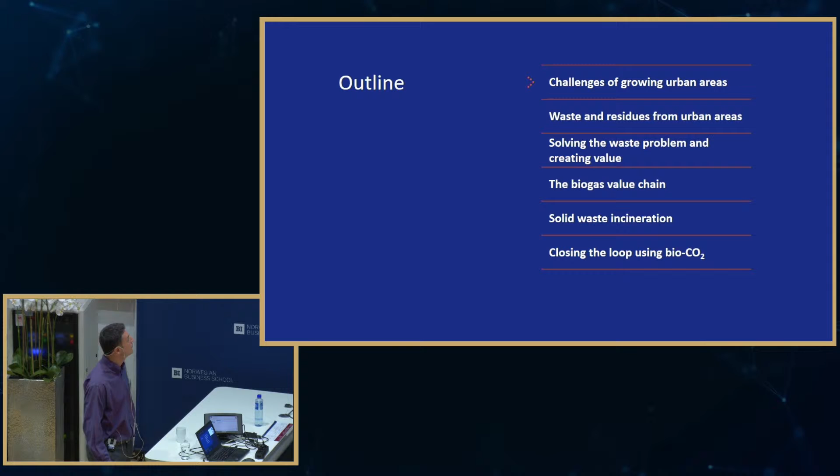So I will go briefly through the context and the challenges the cities are facing with waste. Defining waste and residues which are causing problems to these cities. How we can solve the problem and create value, and choose two examples, the biogas value chain and the solid waste incineration that was mentioned by Jannike. I will try to give you also an insight of how we can close the loop using CO2.

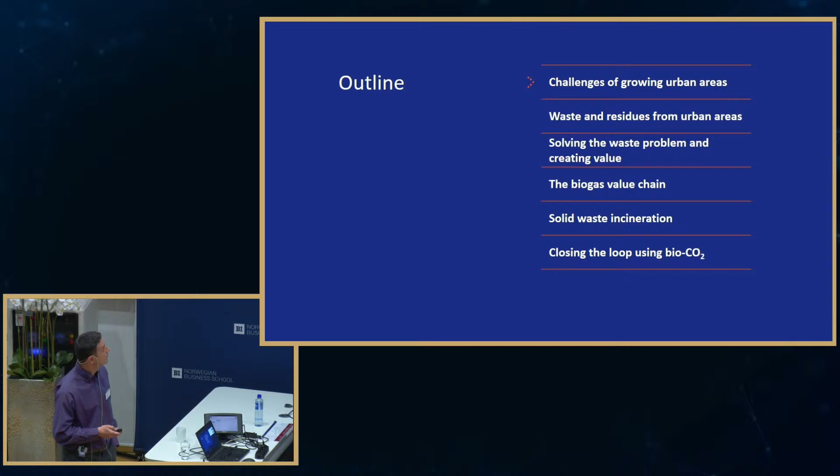Is it working? Yes, it's working. Just take it closer. Close enough. It's better now? Yeah. Okay.

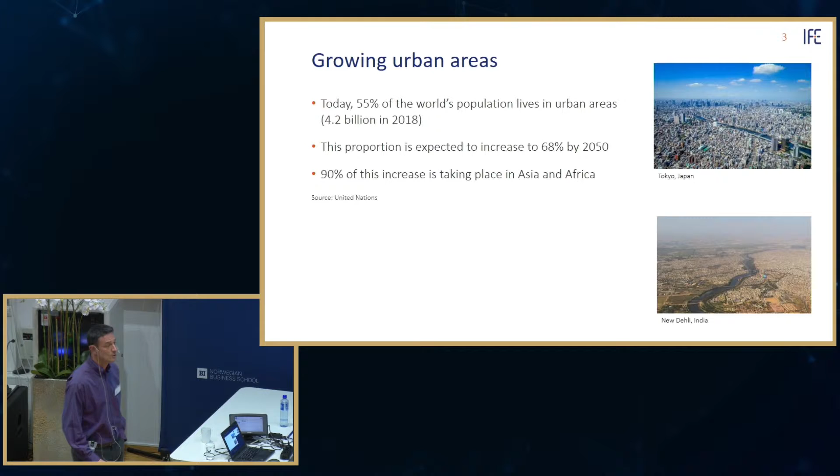So the context is that we have growing urban areas. This is for sure. And about 68% of the population will live in urban areas by 2050. And 90% of the increase is going to take place in Asia and Africa, so not in developed countries. So we all agree that sustainable urbanization is key to solve this issue.

And many countries are actually facing these problems in growing cities: housing, transportation, energy systems, and other infrastructures like waste handling, which I'm going to focus on. So the idea here is that waste handling in urban areas has to be part of the solution.

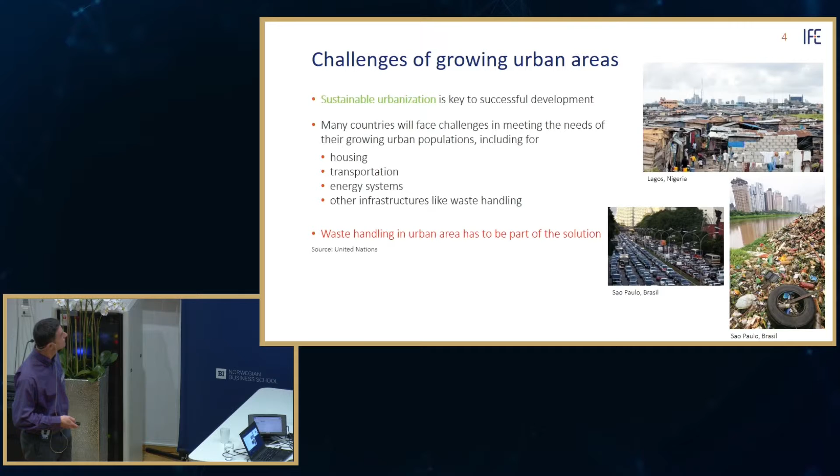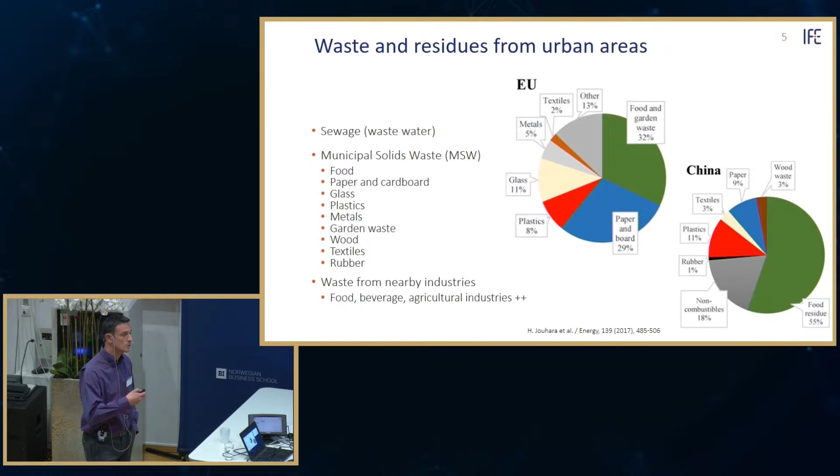So which waste are we talking about? In cities, basically, you have liquid waste, which are sewage, wastewaters, and solid waste that we define as MSW, municipal solid waste. Some of these wastes are sorted out, and we try to recycle, and the rest we have to get rid of in a smart way.

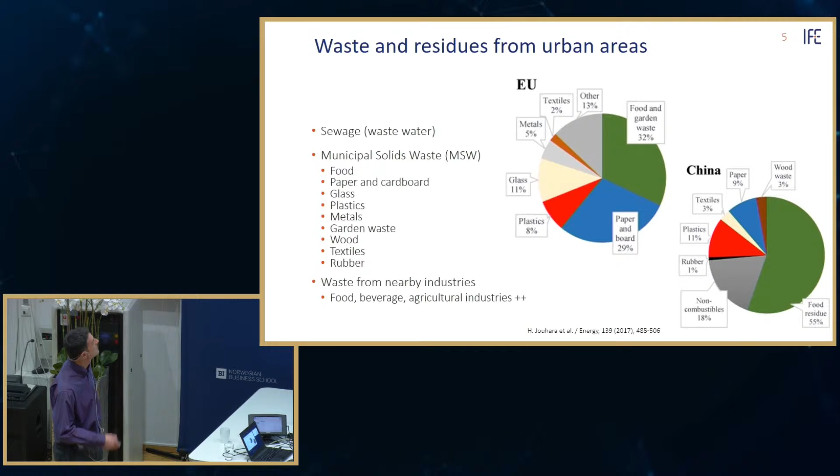There is a comparison between EU and China. You see that what is dominant is food waste, paper, plastics, glass, metals. You have also waste produced from nearby industries, close to cities. That's typically food, beverage, agricultural industries.

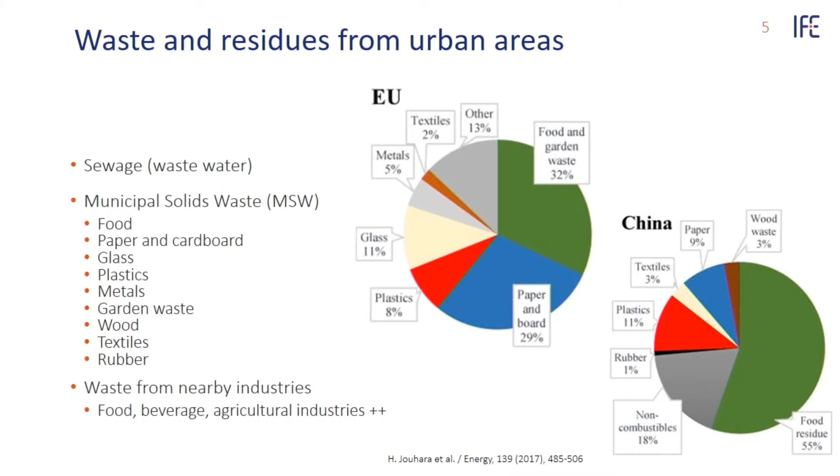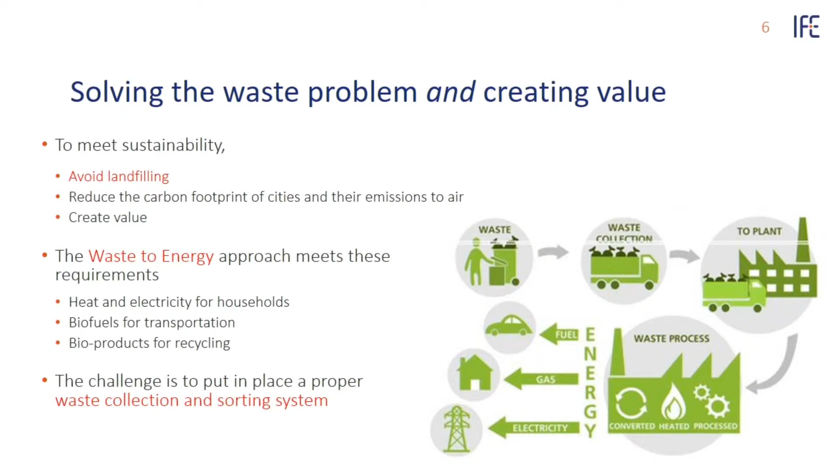So how to solve the problem and try to create value? Well, we agree that we have to meet sustainability, and we have to avoid landfilling. Landfilling can cause pollution to ground and water, and this we want to avoid. It's also important to reduce the carbon footprint. We've heard that today many times, and emissions to air, among others, NOx, and try to create value.

So there is one clear option which has been pointed out today several times. This is what is called the waste to energy approach, because it meets all these requirements. You can produce heat and electricity for households. You can produce biofuels for transportation or other clean fuels.

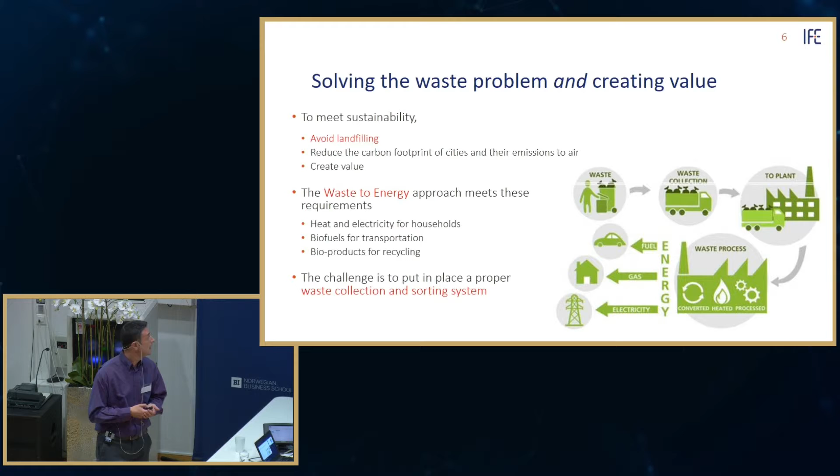Biogas is produced in a closed system in a so-called anaerobic digester, which is actually the biodegradation of organic matter in the absence of oxygen. That's the microorganisms eating the organic matter. Typical biogas composition is about 60% methane and 40% CO2. And this CO2 is mostly bio-CO2, if it's only organic matter, of course.

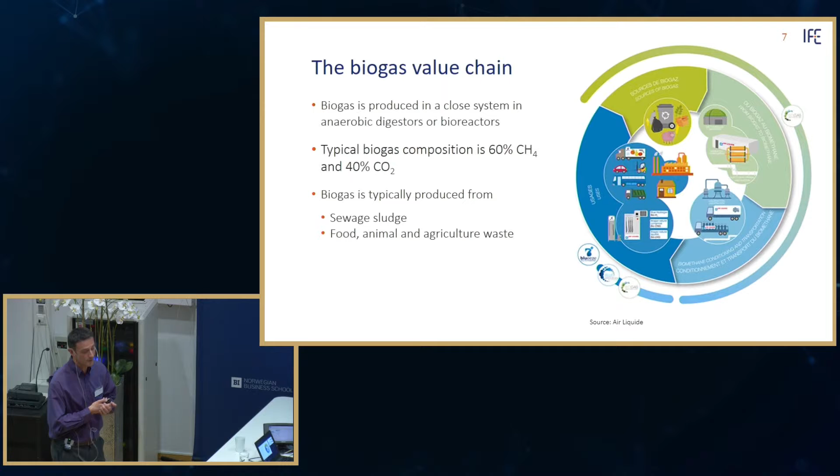Biogas is typically produced today from sewage sludge. So the sludge that is recovered after the treatment of wastewater. That's quite big quantities for big cities. And food, animal, and agricultural waste. So food waste residues, and what we throw away, manure from animals, or residues from industries where you produce food from animals, and crops, agricultural crops.

So we go into detail for this value chain. So you have the digester in the center, and you feed the different waste in the digester, and what you get from it is a raw biogas containing mostly methane and CO2, plus some impurities, and a solid residue that we call digestate.

This biogas, you can use it directly. You have to clean it a little bit and remove some water, and then you can burn it in a so-called combined heat and power installation, where you produce both heat, which is mainly hot water for district heating, and electricity.

The most common way is to use so-called gas engines. So it's a bit bigger engines than what you have in your car, but it's the same principle. Coupled to an alternator to produce electricity. And recently, fuel cells have been pointed out as a very good option because their efficiency is much higher, 50% compared to approximately 35-40% for gas engines.

Then this biogas, you can upgrade it and increase its value. If you increase its value, you have to remove what doesn't have too much value at first, at least. That's the CO2 and impurities. And then you're left with what we call biomethane, which is 97% methane.

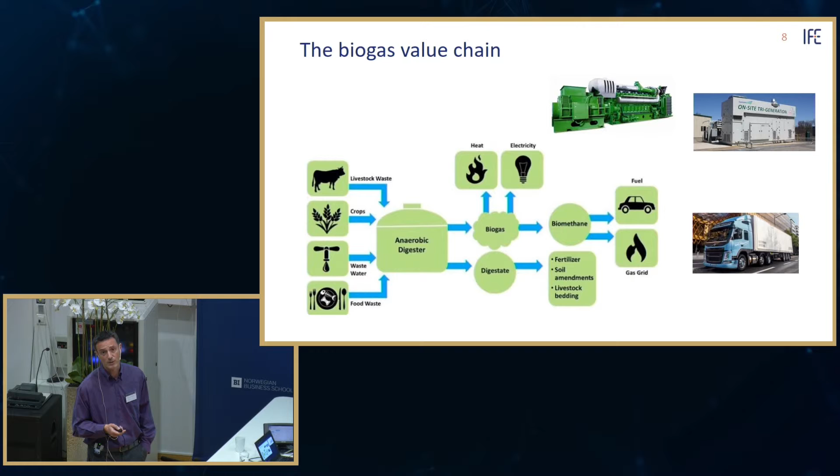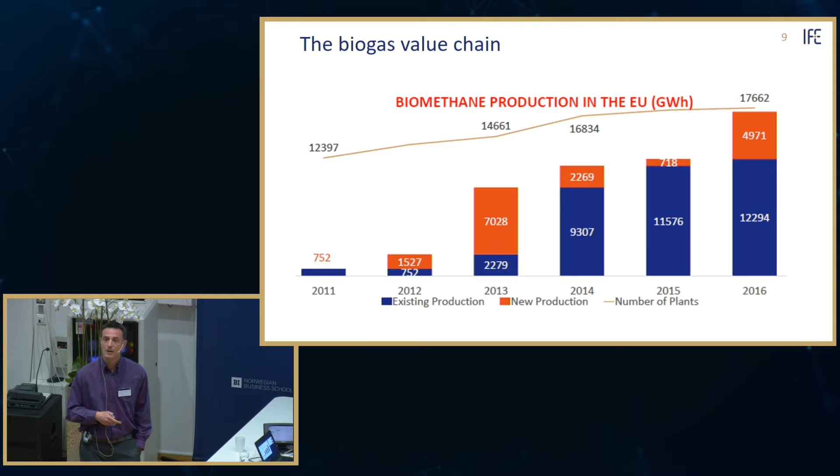Biomethane production is increasing dramatically, I would say, in the EU. You see here from 2011 to 2016. And we are exploiting just 10% of the possibilities we have. It's true that from cities it's a bit limited, but it can be expanded around cities also to other types of organic residues.

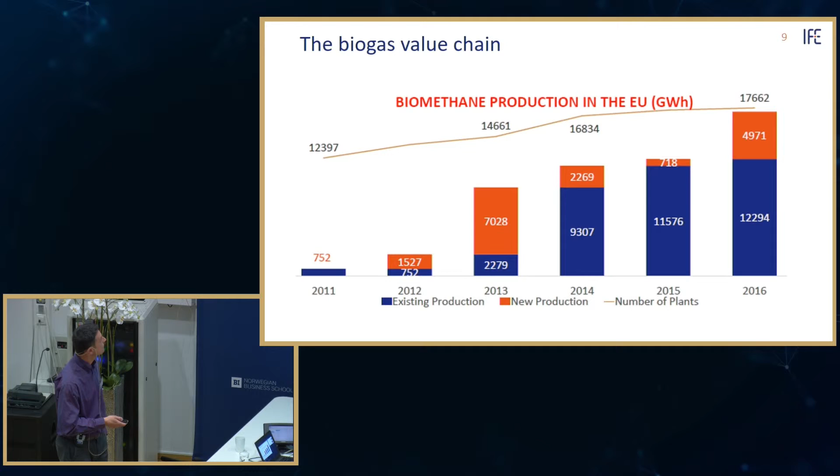But there are also other uses of biomethane or biogas. Of course, the first approach is to substitute natural gas, which is fossil, and the CO2 emissions from this natural gas are harmful for the environment. And by doing that, you reduce the carbon footprint. So if you do so, all the products produced from natural gas reduce the carbon footprint.

But one of the products from natural gas is hydrogen, which is used as a chemical in many industries, and it's also a green fuel, a very clean fuel. So by converting this biogas or the biomethane to hydrogen, we can contribute to produce green hydrogen as clean fuel, and contribute to the early decentralized implementation of this market, which is, I would say, unfortunately, a little bit competing with the battery market for vehicles.

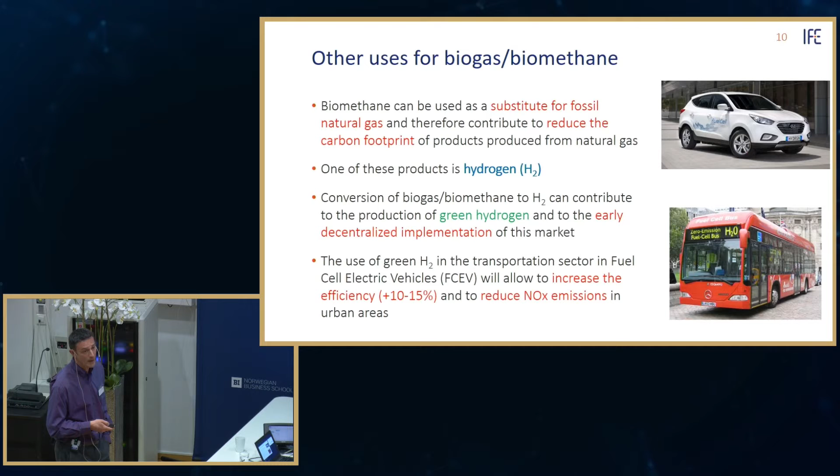So the first application is, of course, for transportation, for fuel cell electric vehicles, or even buses. The advantage of doing so is that you increase the efficiency, because the fuel cells have much higher efficiency than gas engines. We increase it by 10 to 15%, and you also reduce NOx, which is a problem not mentioned too much in cities, but which is a problem. It's not only CO2. So this is a clear option for another use of biogas, and it's moving at the moment around this.

How to do so? To convert biogas to hydrogen, we use the reforming route. It's a route where you need first to clean up the gas and upgrade, as I mentioned, to remove the CO2 and the impurities. And then there is the so-called reforming step, which is the conversion of methane to what we call syngas, which is a mixture of hydrogen and carbon monoxide. This carbon monoxide is further transformed to more hydrogen and CO2 inevitably through the shift reaction. And then the hydrogen and CO2 are separated to produce both hydrogen as clean fuel and this CO2. This CO2 is bio-CO2, and it has a value, as I will show you later.

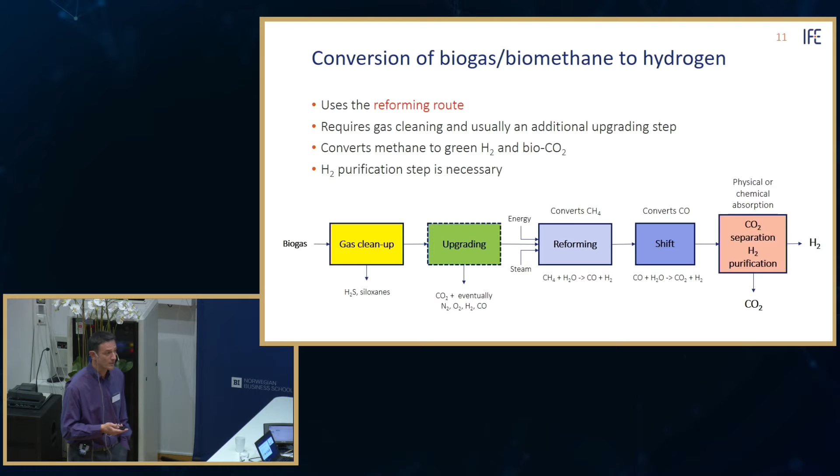Another way to really utilize everything from the waste in the biogas value chain is to handle this digestate, the solid residue you have from the digester itself. And here, the common route is to use the pyrolysis route. You can also use gasification, but pyrolysis is interesting because you obtain from this step three phases, I would say. One gas phase, which can be processed the same way as the methane phase, to produce hydrogen and bio-CO2.

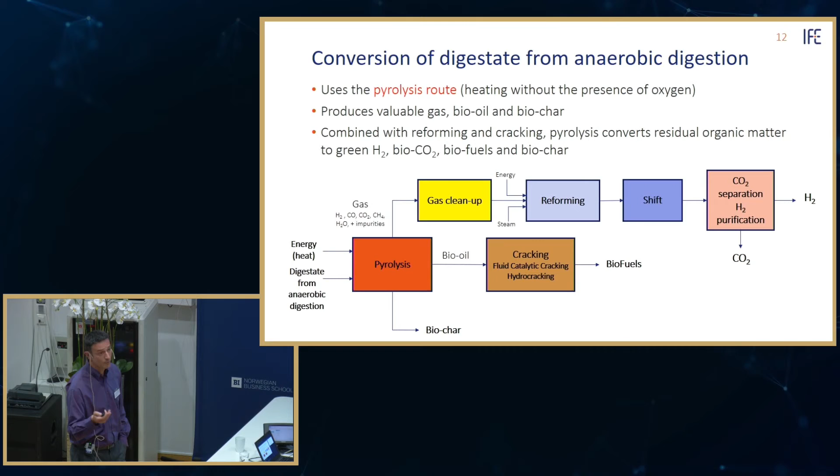A bio-oil, which is very similar to the fossil oil we exploit today. By cracking it, you can produce liquid biofuels, which are very similar to the biodiesel or even gasoline we are using today. And there is also another solid fraction, which is the biochar, which is used today as fertilizer, and also as a carbon fixator in soils.

Then the other example I would like to tackle today is the solid waste incineration that was mentioned by Janneke. There are about 450 incineration plants in Europe, and they generate a lot of CO2. So of course, you can capture the CO2 if you want to be carbon negative, but you can also reuse this carbon. And one way of using this carbon is to combine it with renewable hydrogen to produce chemicals. And two chemicals of choice are either methane or methanol.

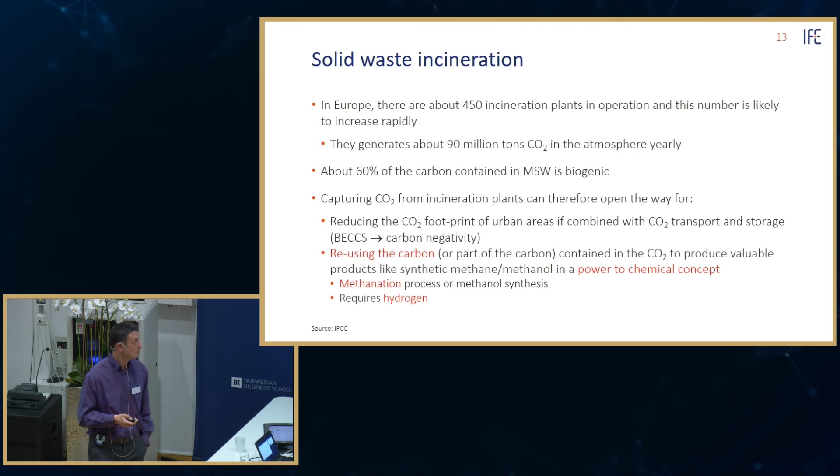It goes through the methanation step, which is the reverse reaction of reforming, actually. You combine CO2 and renewable hydrogen produced from excess renewable power, of course, to produce methane as a chemical. And once again, this methane can be used as a substitute for natural gas to produce products which don't release fossil CO2.

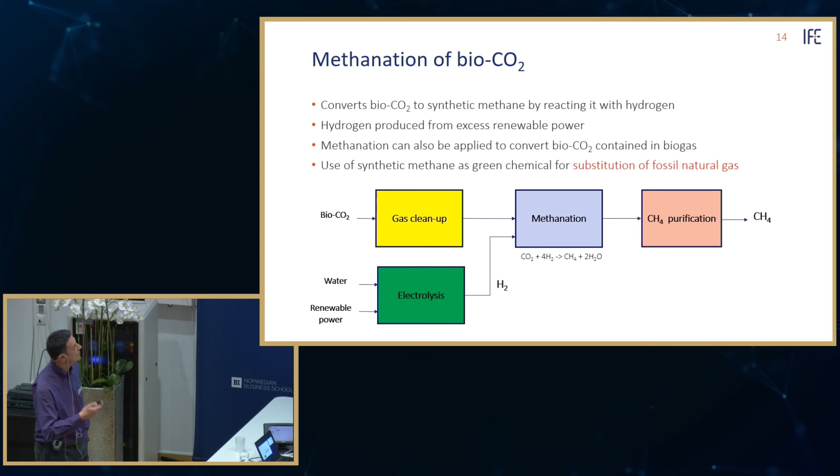Then to finish here, to give you a kind of overview, my message is that by using the bio-CO2, which is either produced in the biogas chain or in the solid waste incineration, we can close the loop, and we can do that in a sustainable way and create value. You can run the concept which is called food to waste to food by reusing the CO2 in greenhouses, for example. And you can also do that in plastic to waste to plastics by capturing the CO2 from incinerators, combining it with hydrogen through methanation, and using the methane to reproduce plastics, which are green in that case. The challenge is, of course, to build a value chain and also to reduce the cost of the technologies.

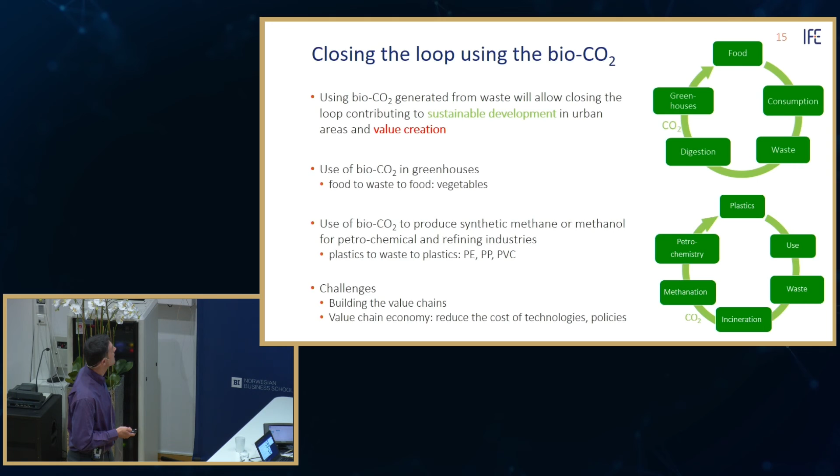So briefly, just to finish, if you allow me, I'd like to show you what we do at IFE related to this field. We have developed a hydrogen production process from biogas with CO2 capture to extract this bio-CO2 also as a valuable product. It has potential to reduce the cost of the reforming technology by about 20% due to process intensification.

We do research also on production of biomethanol from biomass, combining gasification and this process. And biomethanol can be used to produce a lot of chemicals like bioplastics, for example. And also enhanced methanation, because the methanation process which is available today is not very efficient and needs improvement and cost reductions. Thank you.